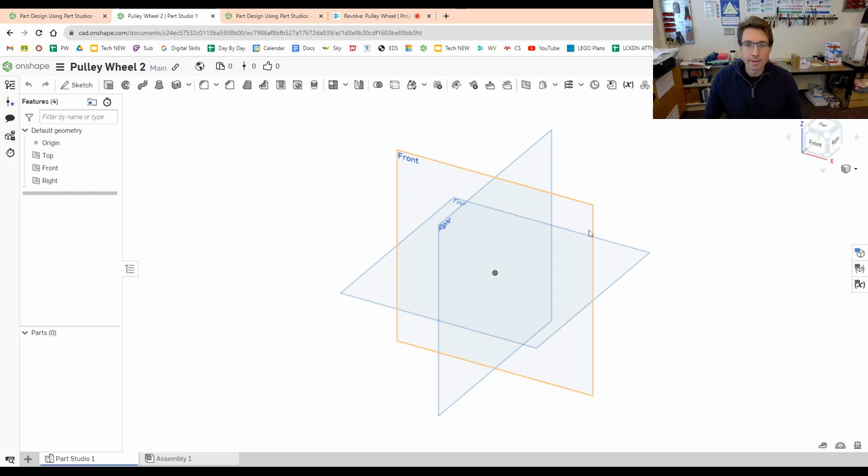The first thing is I'm going to use this front plane here, so I'm going to turn off the top and the right, just leave the front for now. Let's go ahead and dive in here, and make this pulley wheel using the Revolve.

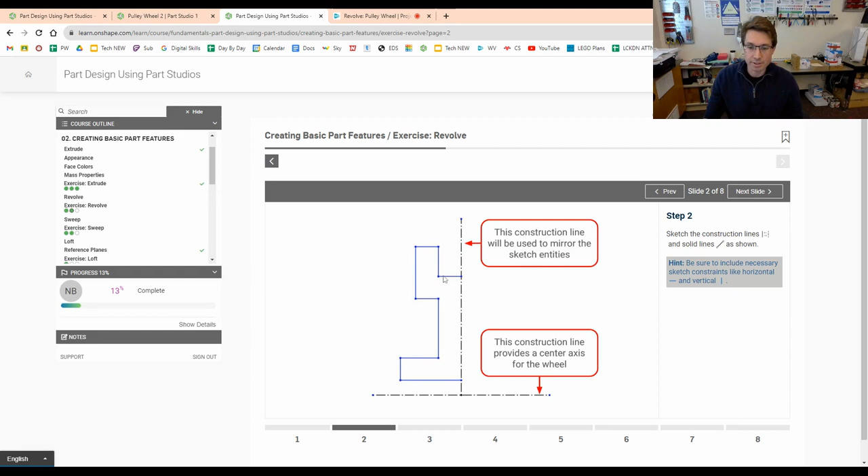So they have you here using the front plane. I want to sketch, so let's click Sketch, Front Plane, click Next. We're going to make two construction lines, and then create this quarter design to mirror and revolve. So the first one, we're going to click Line, Construction, go here to the origin, go somewhere to the left, click, and then follow along to about 5 inches here, hit Escape.

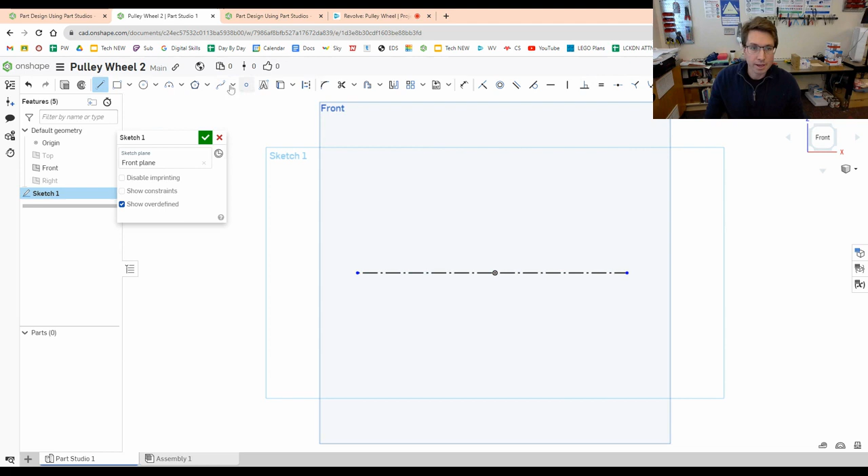Then we're going to go ahead and click on Line, Construction again, and let's bring it way up here, about 2 inches there.

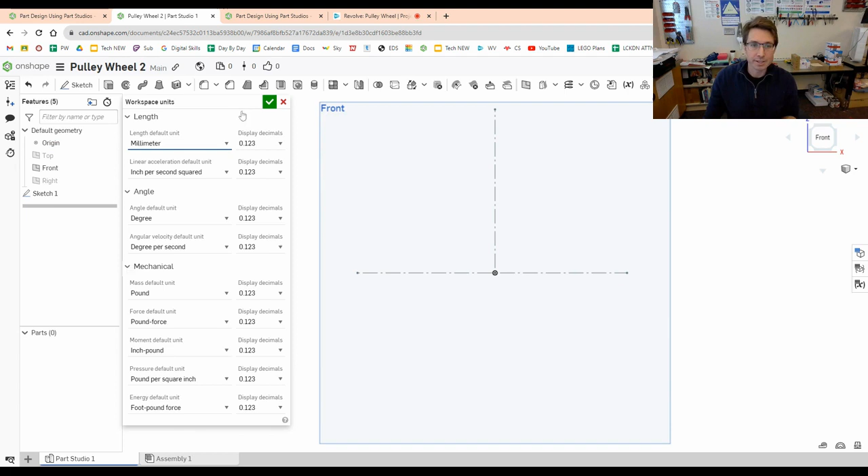Now once we have our two construction lines, I am going to change our unit here, because you'll see in this tutorial they use millimeters. So you click on the 3 lines here, workspace units, and we have our default to inch. I'm going to change it to millimeters for this lesson, just so I can make sure my dimensions are exactly correct.

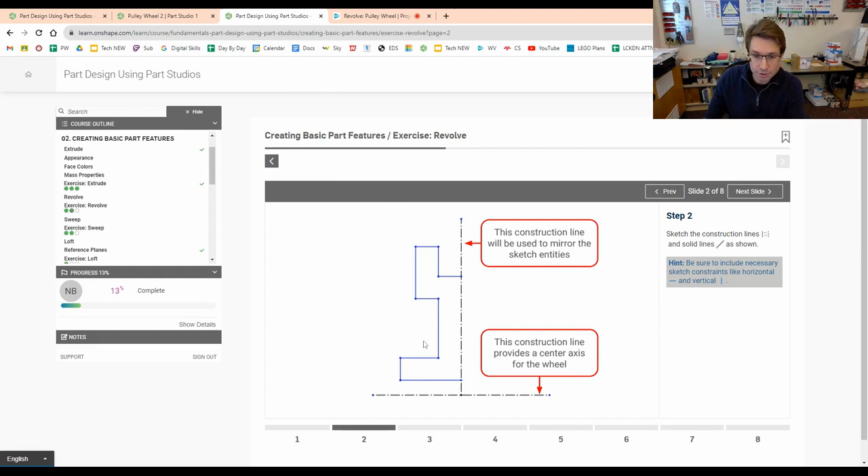So we're going to create this quarter design, and then we're going to mirror it across. Just before I start here, I see that it comes out a little bit further on this leg. Here's the inside, and then that groove. Just trying to remember what this looks like. It doesn't matter, we're going to dimension it.

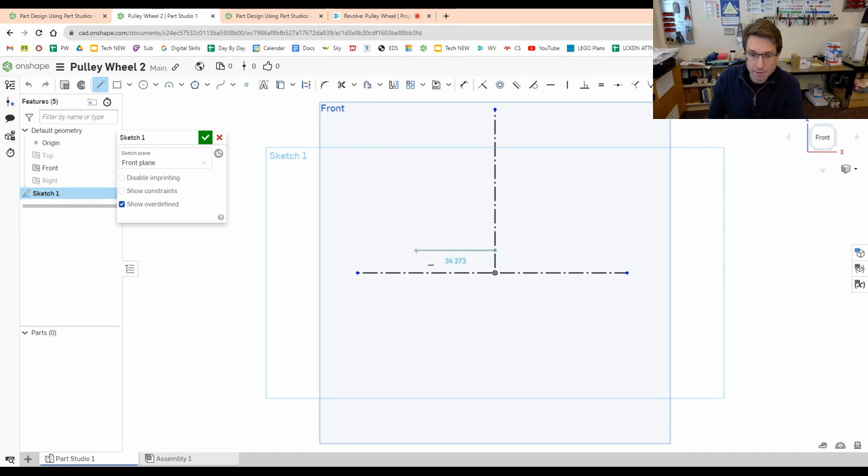So click on Sketch 1, Edit, and let's just click on Line here. There is some gap between this one, longer leg, shorter leg. Let's go here, a little gap, longer leg, shorter leg. Here's the shorter one. Control right click to move it up.

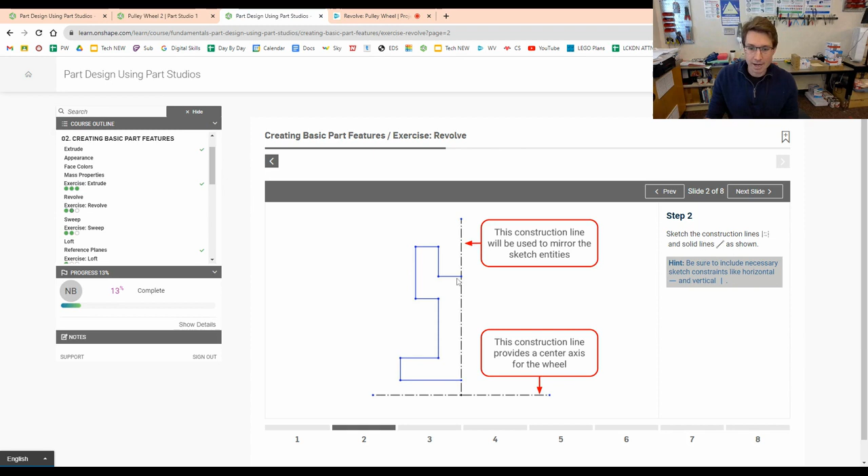Oops, don't know what happened there, but let's just get Line back. And there you go, so there's our basic design. We're probably going to need to drag that one up a little bit longer. Now you can see it doesn't actually match very well, but I'll go ahead and edit that here in a minute.

So go select all the lines, including that middle line there. Click Mirror, click on your construction line here, and now we have this mirrored one.

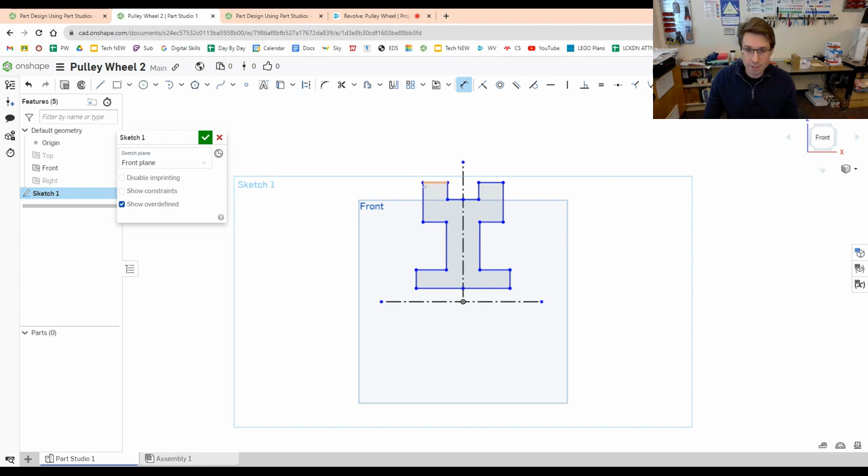So clicking the dimension tool, and I'm going to start with my lines that we mirrored. So this one to, there we go, 12.5 -- all right, that's my first one. I'm going to drag that out just so I can really see it.

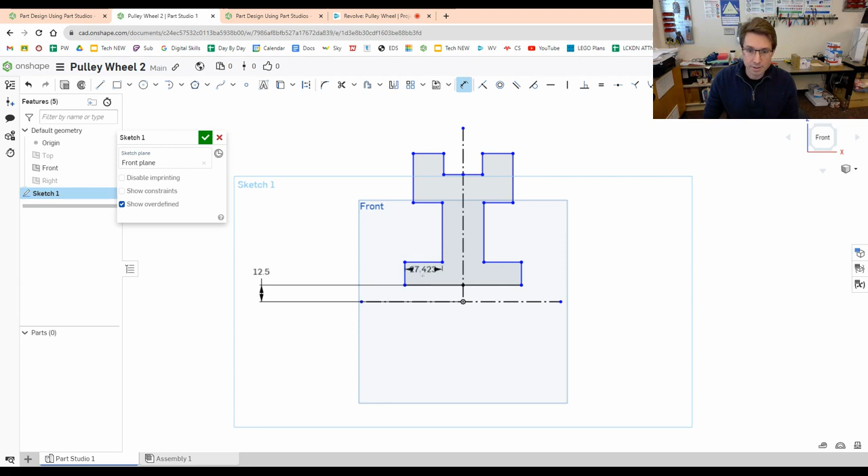My next line is going to be this line here, and that line is 75 across the whole thing, which means to the middle it's going to be 37.5. So dimension this line to this one here. Whoops, let's make sure we have dimensioned this line to this one, and we know that's going to be 37.5, which is half of 75. And I'll drag that up so it's really easy to see.

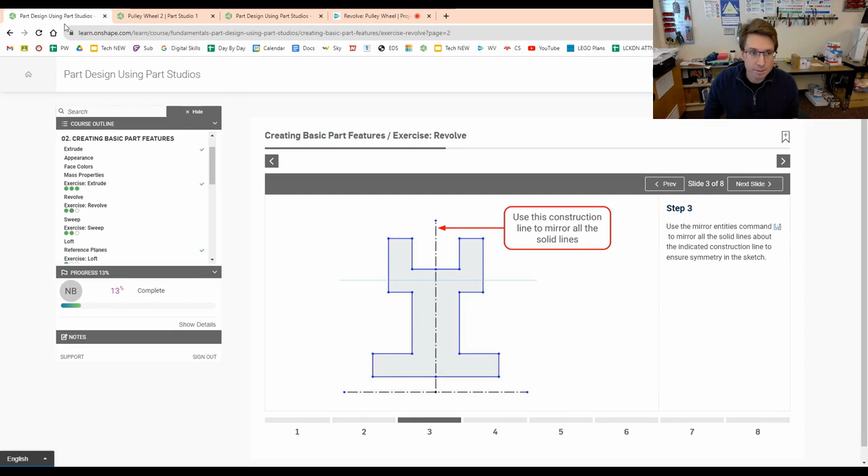The next line is going to be this one here. That line is 165 from the center, which let me just double check here. I think that's 165 divided by 2, 82.5. So dimension this line from this one. There we go, oh look at that, almost right, 82.5. And then I'm just going to drag that up so it's really easy to see.

Now we have this line. That one is 200, so that's going to be 100. Oops, I think I might have messed up here. It's this line to this line. There we go, 100. Look, I almost had it. I like these to be nice and up so they're easy to see.

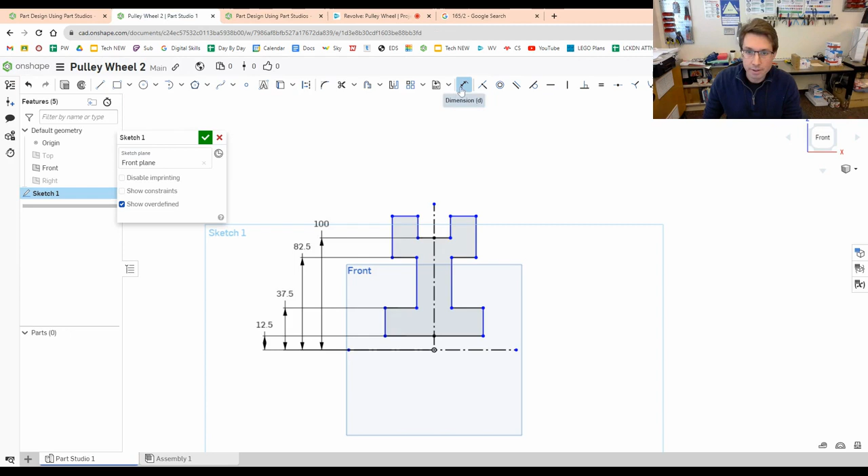And now that top line there is at 250, so 125. Dimension this to that, and 125 millimeters. There we go. So all of the horizontal lines are dimensioned.

Now let's do the vertical ones. These are actually a little bit easier because we can dimension across. So let's start with the outer one. That's 100 across, so the first dimension is this one to this one, 100. Second dimension is this one here, which is 40, so that's going to be 20. Yep, 40, we don't do it in half. 40.

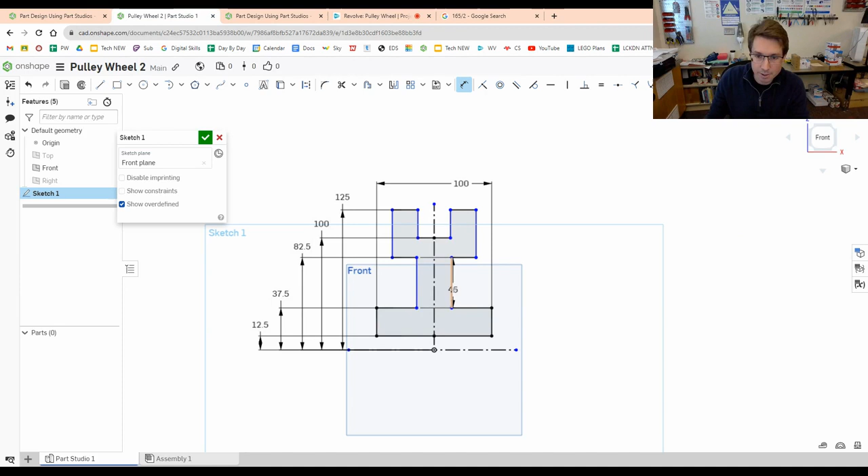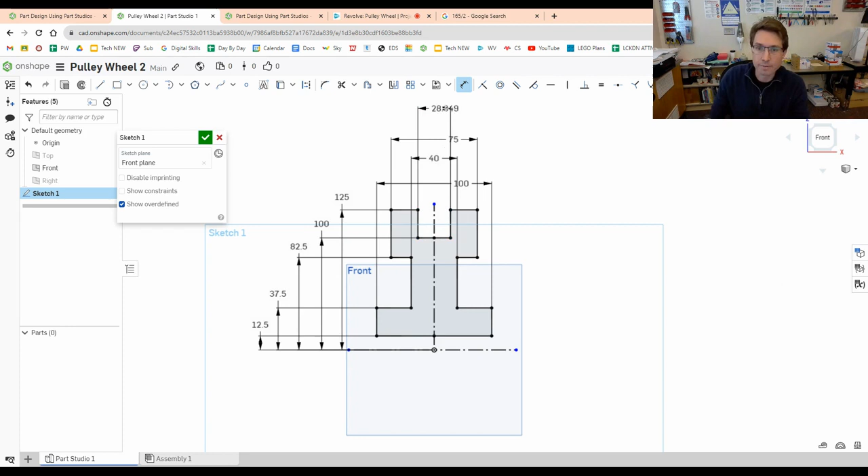And then these outer ones, 75. See, these are fast if you don't have to divide by 2. 75. And our inner ones are 40 again. So this one, boom, boom, 40. There we go, and now we're finished, so we can hit check. We have our shape, let's just double check it here.

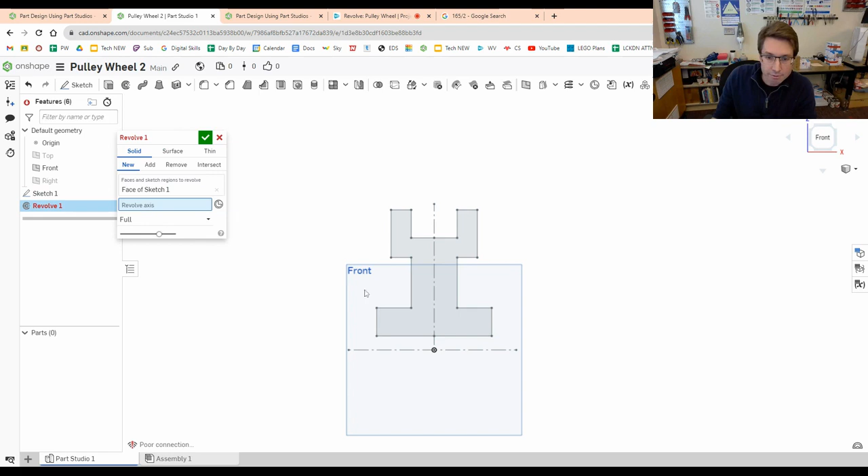Yep, that looks correct. Okay, so now what we're going to do is we're going to use the Revolve tool. We're going to create a new revolve on the face of the sketch to revolve all the way around. So let's go ahead and click Revolve. Let's click on the face of the sketch, and the revolve axis will be this construction line down there. Whoa, look at that, that's pretty cool.

Check. Now let's bring that up. I'm going to turn off my front plane. There we go, that's great. Look at that thing. So we're going to right click, hit isometric to get that perfect screenshot.

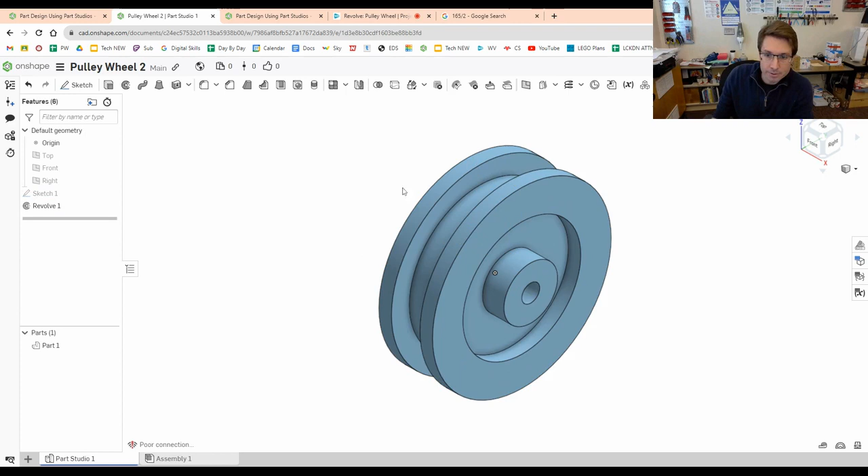So this will be the extrude, the revolve sketch. And to get the dimensions, you will have to be here from the front. So you can screenshot that right there, and they should all be black and dimensioned with all the correct numbers.

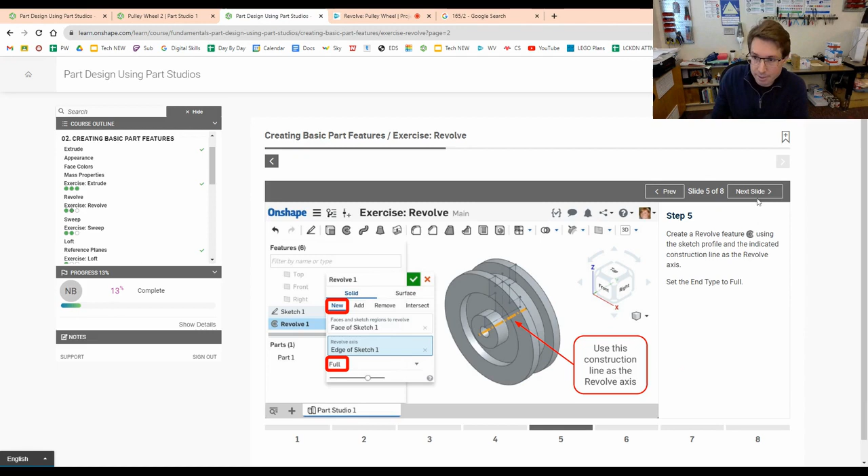That's looking good. Now, finally, what's our last step? Here, we're going to name the part, and we're going to assign it. So, part 1, rename wheel. And let's go ahead and give it a material here.

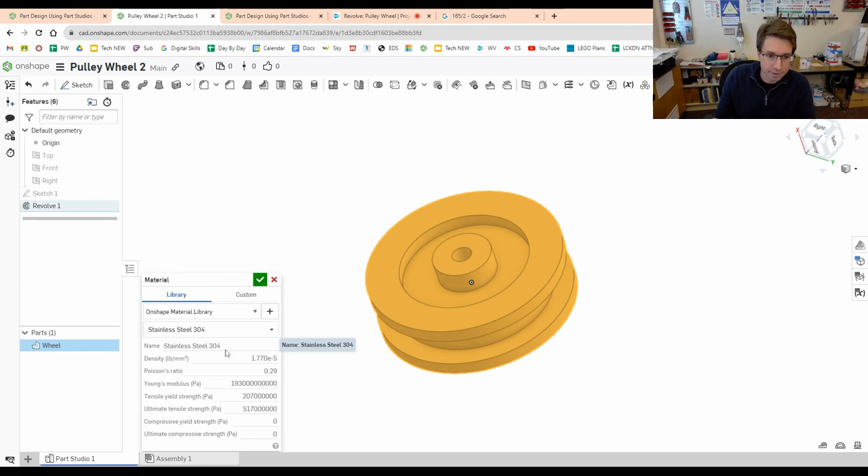So click on the wheel. Now, what do we do? Assign material. And let's go drop arrow. What do they want us to have it at? 304. Stainless steel 304. Check. There you go.

All right, now it's next. And you should be able to see its mass.

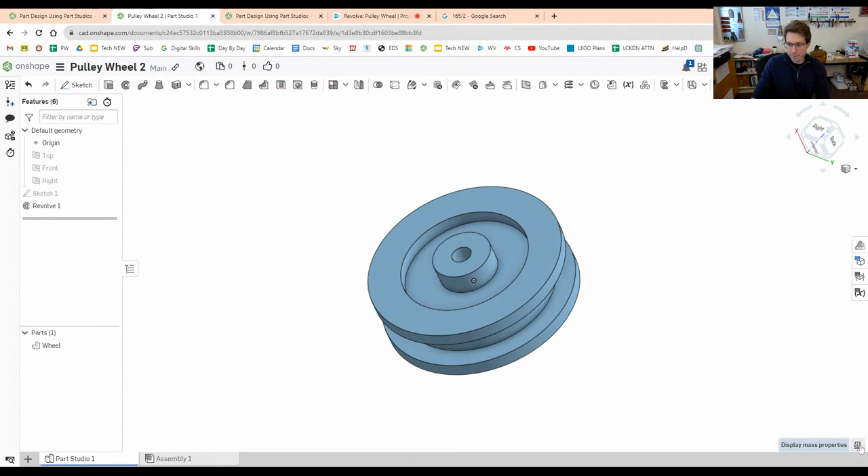All right, and now to quickly check our material, we can click over here on the scale, display mass properties. And let's watch here of the wheel. Boom, and look at this, mass, 43 pounds.

Can you believe that? Well, good work today. Go ahead and screenshot the extrude and the dimensions into your classwork, and you are done.